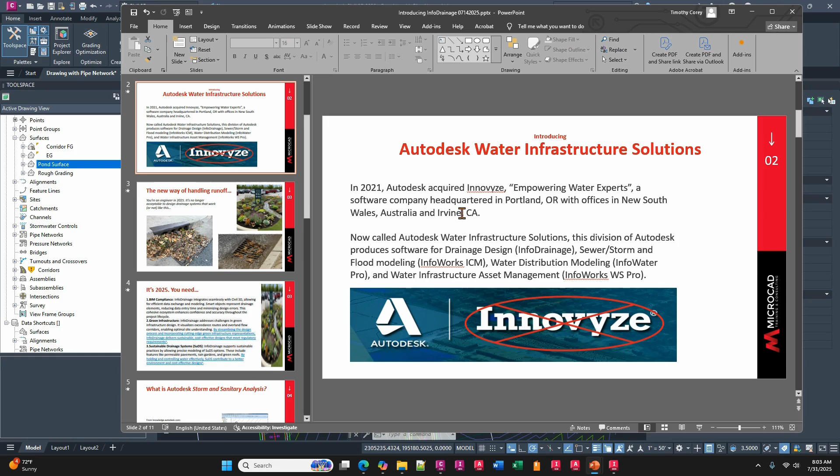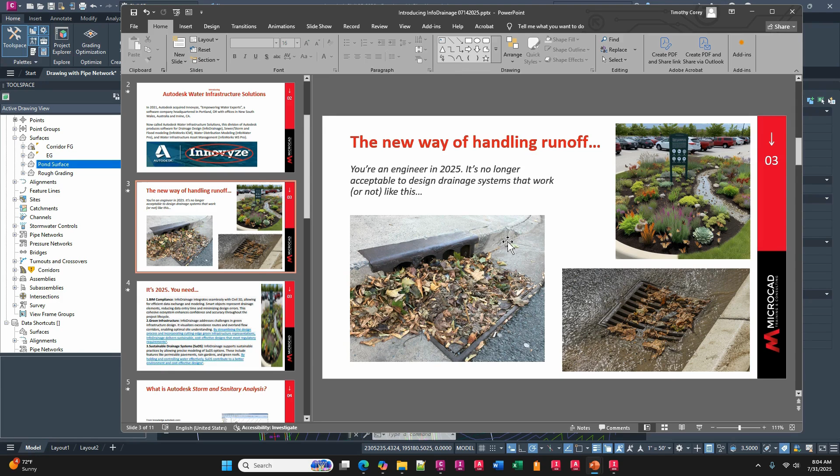So talking about InfoDrainage, this slide really is meant to illustrate how drainage design has changed and what you're trying to get out of your drainage design has changed. As you see on the left, they have a typical grate and it gets filled with leaves or sticks or other debris, and then it's not going to flow correctly. And that's all hard drainage in a concrete gutter, right?

Well, if you look in the upper right of this image, this is a rain garden. This is where InfoDrainage comes in, designs these for you so you can have your infiltration built into the rain garden. So you're kicking out clean water on the other end instead of trying to put all this debris through, etc.

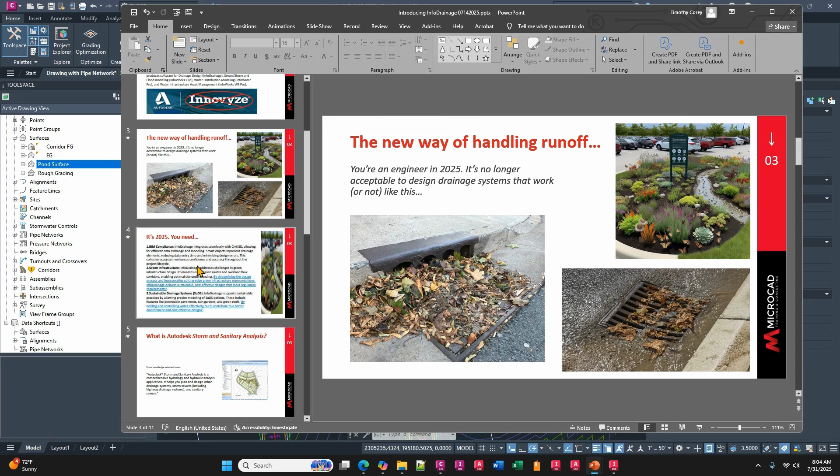A couple other advantages of using InfoDrainage is that it has BIM compliance, which is a big word these days, right? Just about all infrastructure design projects, at least larger ones, are BIM based. If you get hired by an architect for their project, they want BIM based information. Well, InfoDrainage does that.

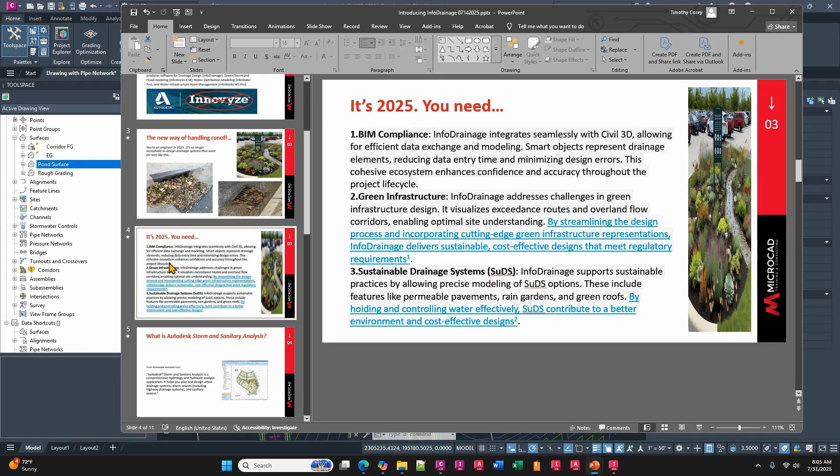It also addresses challenges for green infrastructure design. It can do overland flow corridors, underground calculations. And then there's SuDS, or sustainable drainage systems. That's a feature of InfoDrainage, whereas if you used Autodesk Storm and Sanitary Analysis, or relied on that for years with Civil 3D, it doesn't do BIM compliance, green infrastructure, and SuDS.

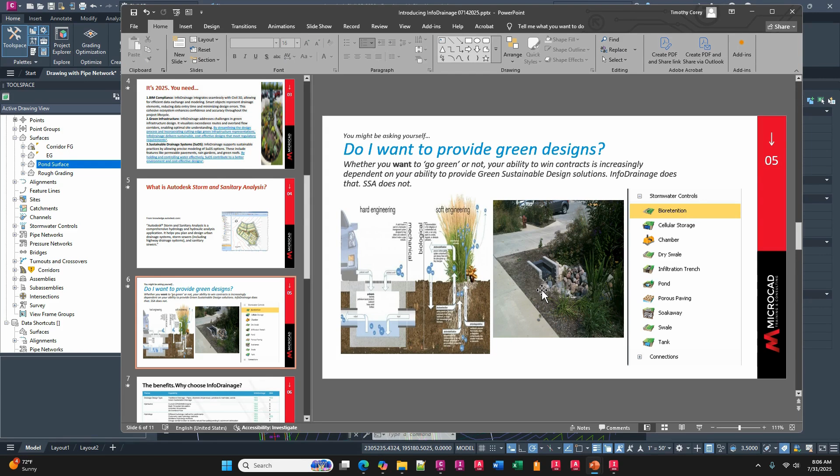So you might ask yourself, if you truly want to provide green designs to your clients, do you want to offer that through your firm? Well, the answer really is, whether you want to or not, if you can't or won't, your ability to win contracts is going to go way down. So this is a way of design that you may want to consider embracing as a way of enhancing your company's offerings and ensuring future work.

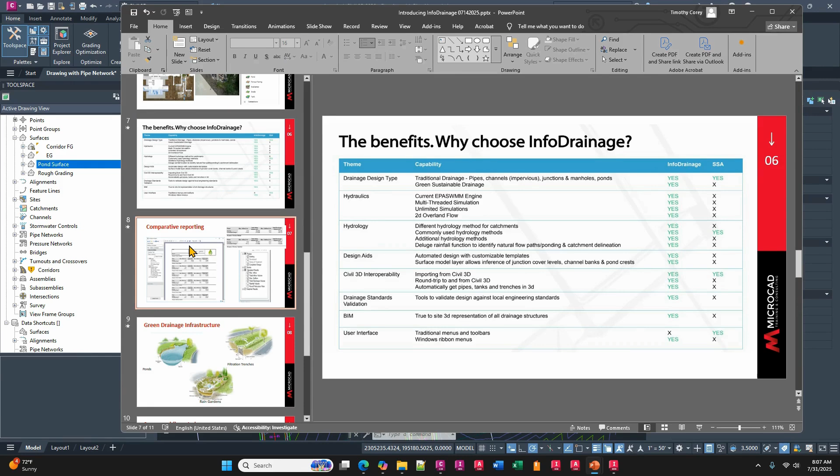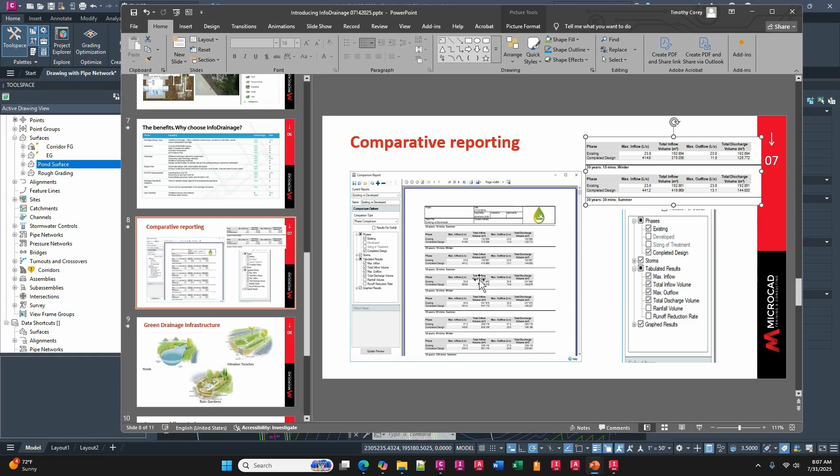This is a comparison. This table shows you the different features in the various versions, InfoDrainage versus Storm and Sanitary. And you can see all the different functionality we have here. Plus there's comparative reporting built in, so I can compare my existing conditions to my completed design. Easy to set up, nice clean reports.

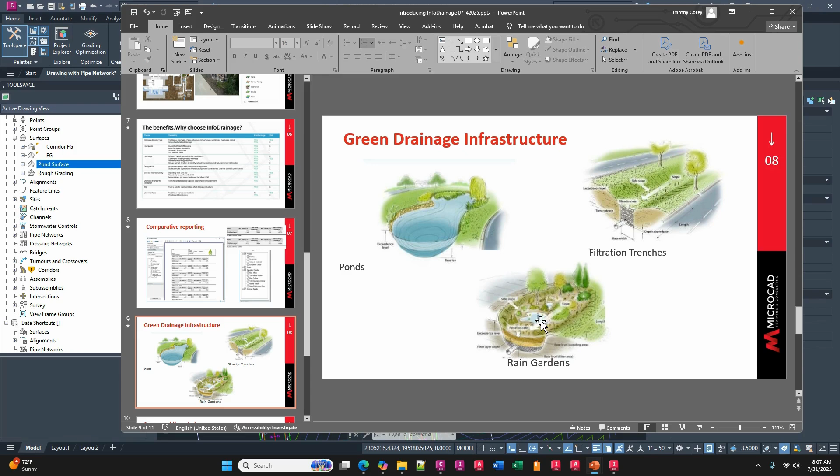This is a picture of a couple of different types of green drainage infrastructure that are provided as part of InfoDrainage. So you can design all these types of drainage systems. Ponds, which we can now do in Civil 3D, by the way, and I'm going to show you that. That's a nice deal. Rain gardens, and then filtration trenches.

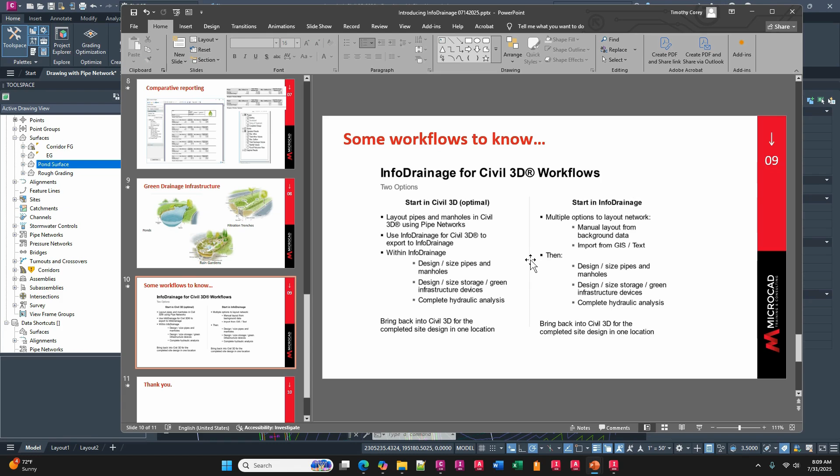If you start in InfoDrainage rather than Civil 3D, you can do manual layout on top of the background data, or you can import from a shapefile or ArcGIS files. Then you'll do your design, et cetera, and bring it back into Civil 3D at the end. So that's just a little workflow on the process.

Okay, let's take a look here in Civil 3D. I don't need to save that. So here's Civil 3D.

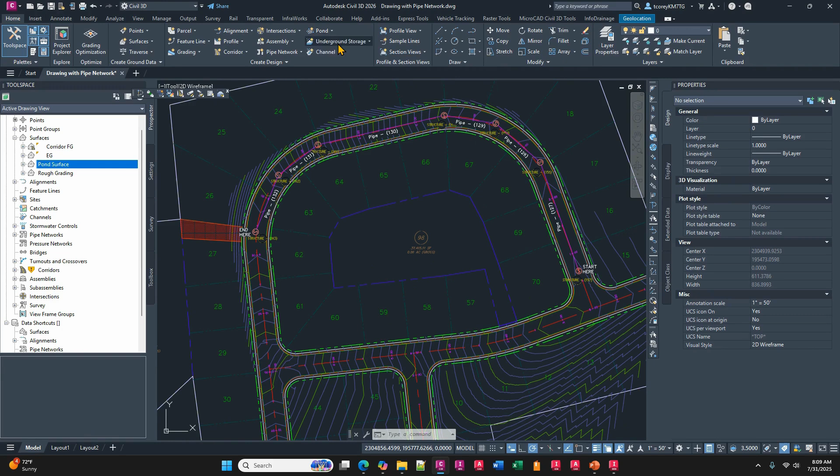I want to show you these couple of new features up here. First off, and I know this is going to be asked a lot about, is pond. People want to be able to create ponds in Civil 3D. Okay. How deep do I want it? What's the inside slope? Make it 1-to-1. And I'll set, I know that I want to use like 800.

I'm cheating, sorry.

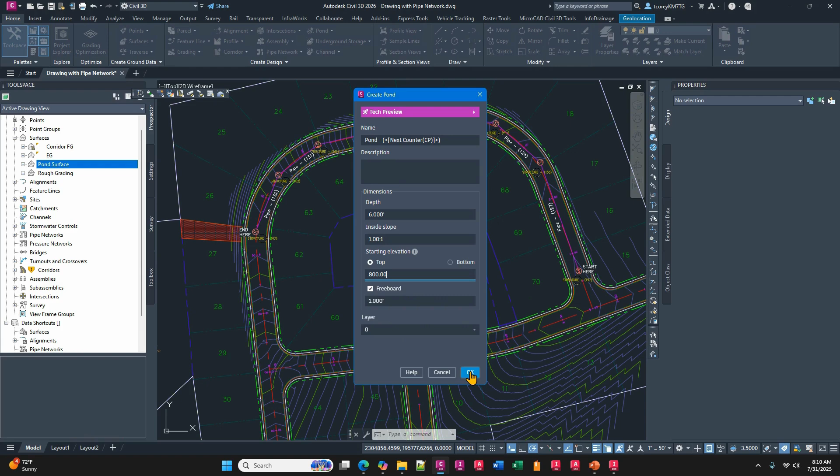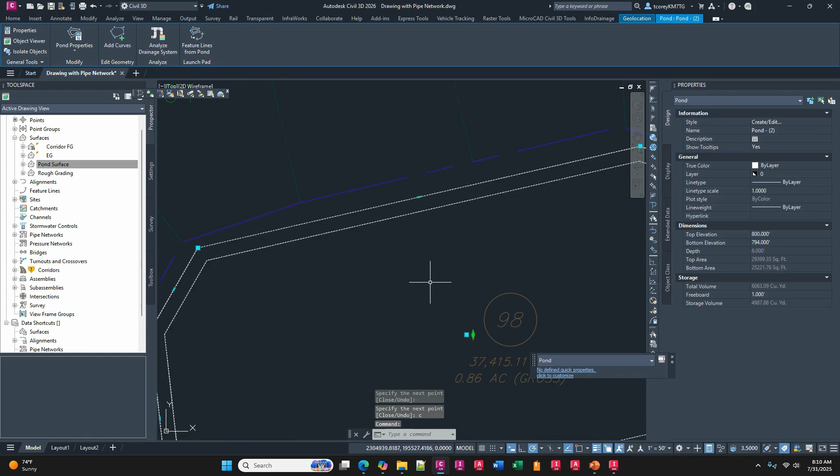And what layer, all that looks good. Okay, so I say okay, it wants to know where to put it. Well, I'll stick it back in here behind these parcels. And close. And you see it automatically builds the line, or it's not really, it's part of the pond. So I don't want to call it a polyline or a feature line at this point, because really that is part of the pond. But it adds that in there for you.

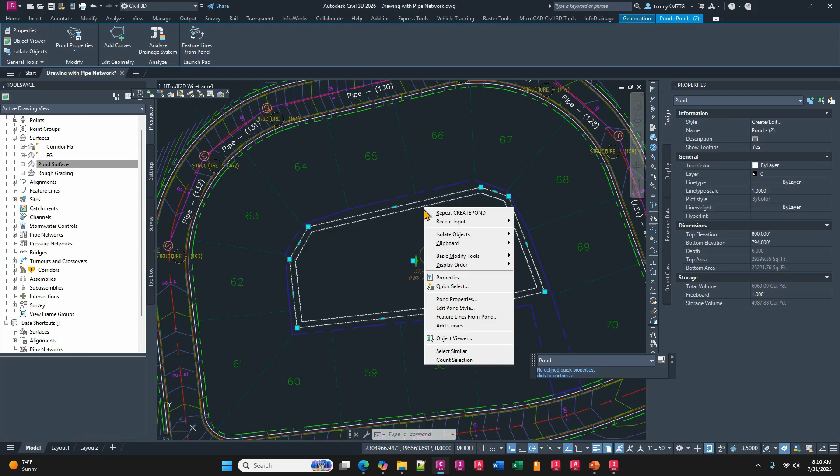Okay. Now what you can do, if you do want to add this to a surface, well, let me show you the properties of the pond first, because this helps you with the design. I can go to pond properties. Okay. Here's my storage. So at 6 feet deep, my rim elevation is 800, and this is the volume of the pond. I can kind of do like a stage storage sort of analysis here if I want.

I could say, well, what if I go to 7 feet? And then it's this much. And I'll do one at 10 feet. Okay, and then if you change the side slopes, maybe here I decide this does want to be 3-to-1 with it that deep, because you'd never get out. Okay.

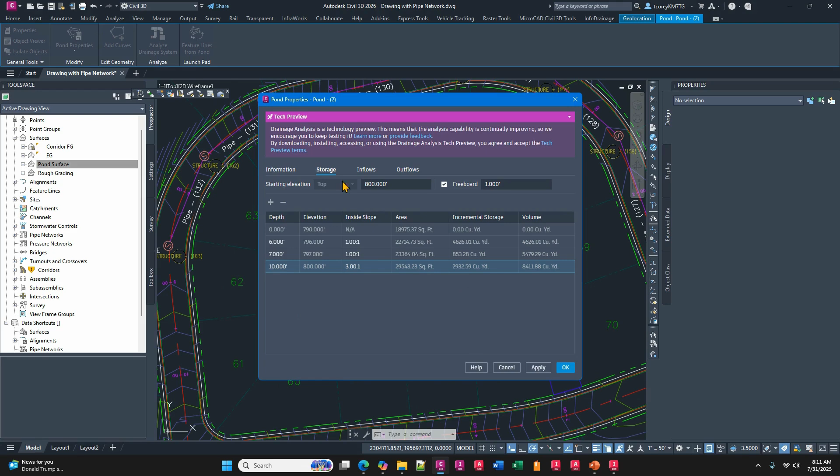Now what happens is it adds each of those lines, or those feature lines, or what can become feature lines, for different storage levels. It adds those into that pond for you. Now I can take this thing and extract the feature lines out of it. What style? That's fine. I'm just going to do the top and bottom and not all these extra ones.

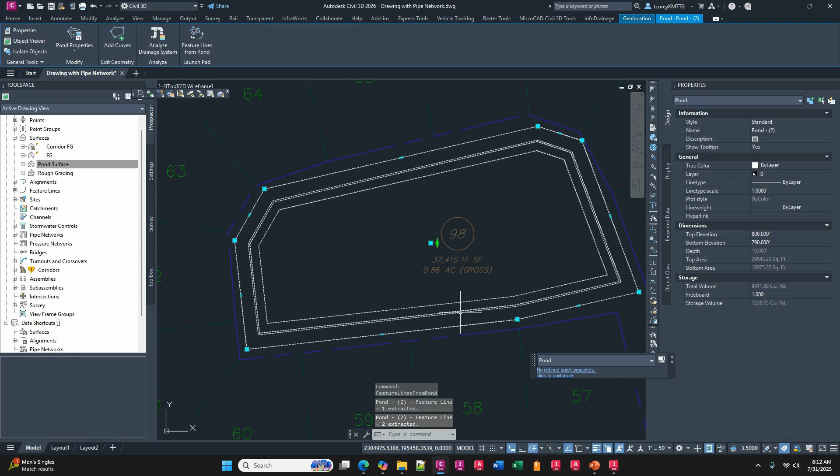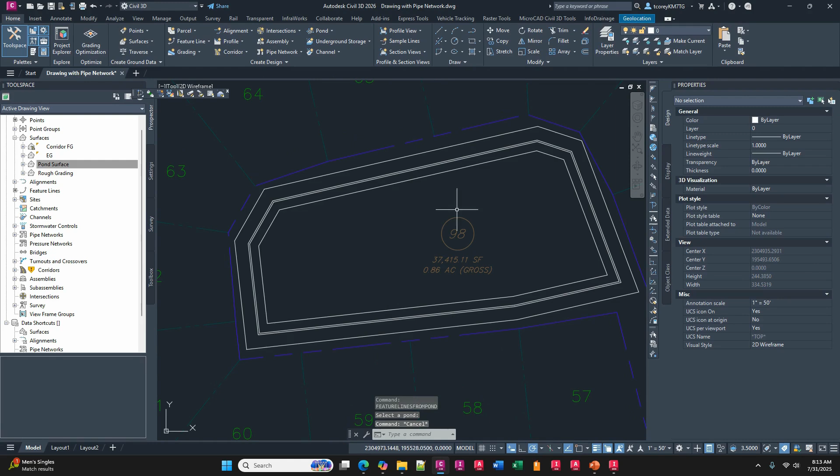If I do a dynamic link to the pond, then I can make it so that a pond surface automatically updates if I modify the pond. I'm not going to do that. I'm just going to do this. Okay, so now I have, where's my layer, C-TOPO feature. There we go. Okay, so it extracted those, and now I have feature lines there.

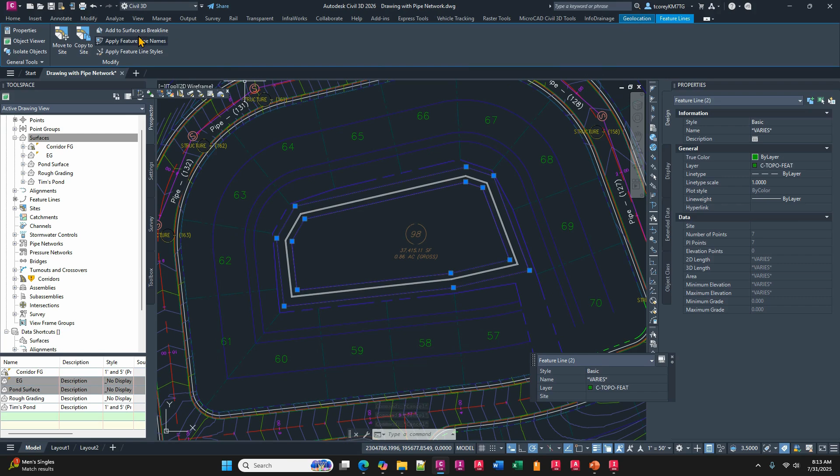So I can add those into a surface, right? I'm going to make my own new surface. This will be Tim's Pond. That's fine. So then I could take those two feature lines, that and that, add those to surface as break line, which surface, Tim's Pond.

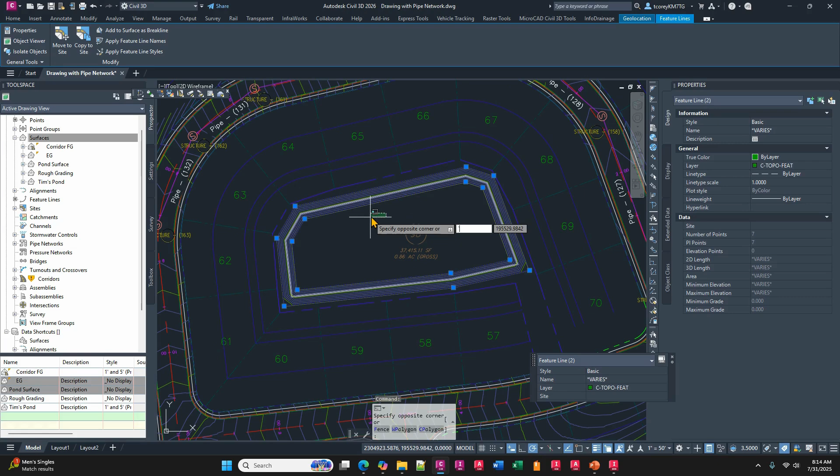Okay, I'm going to add some supplemental points, say every 10 feet. Tighten that 10 up just a hair. Okay. If I can find the escape button. There we go. So now we have a TIN surface of that pond. Object view. Okay.

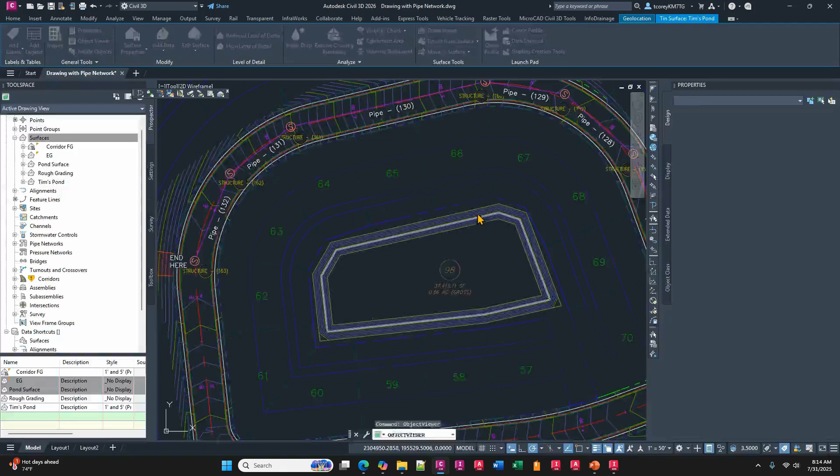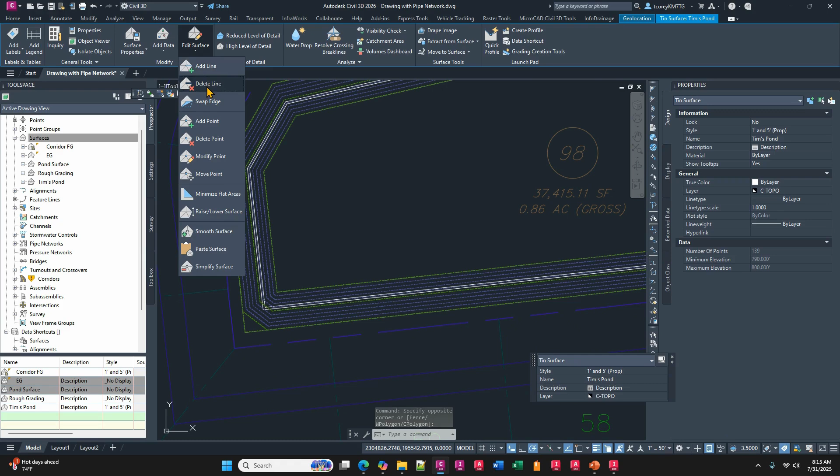Now I'll show you a little trick here for fixing up these kind of deals where it cuts across with the TIN there and doesn't fill in this area. That's super easy to fix. You could have done it in old versions, but in 25 and 26 versions of Civil 3D, you don't have to set a style or anything. You just go here, edit surface, add line, and then it turns on the TIN lines automatically.

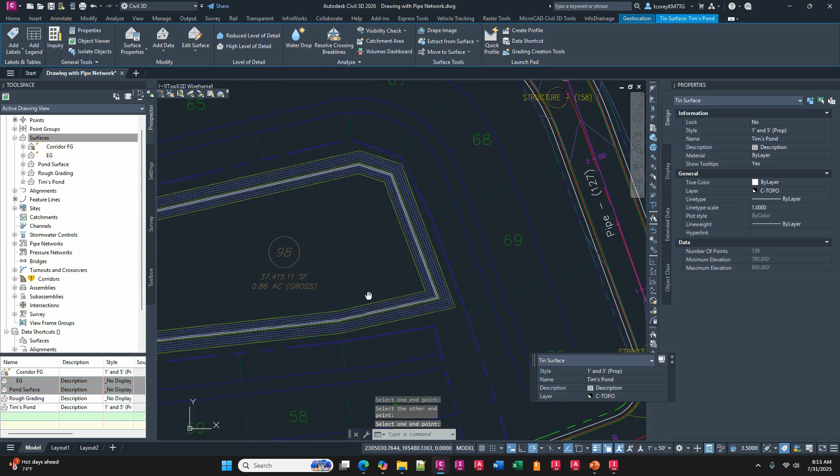And then I can just say I want a line added there to there. That fixed up that one. And I'll do another one here to here and fixed up that one. Let's do that. So now my pond looks correct, right? If I wanted to take that and make a single surface that shows all of it, I could go, I think there's a boundary in this surface here.

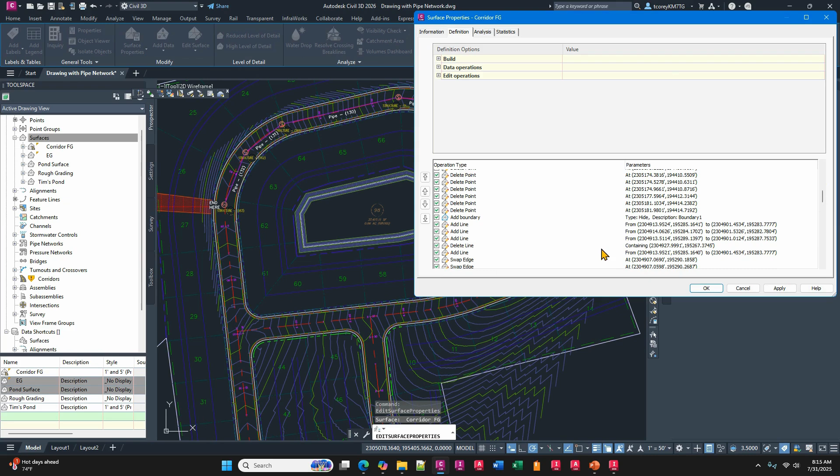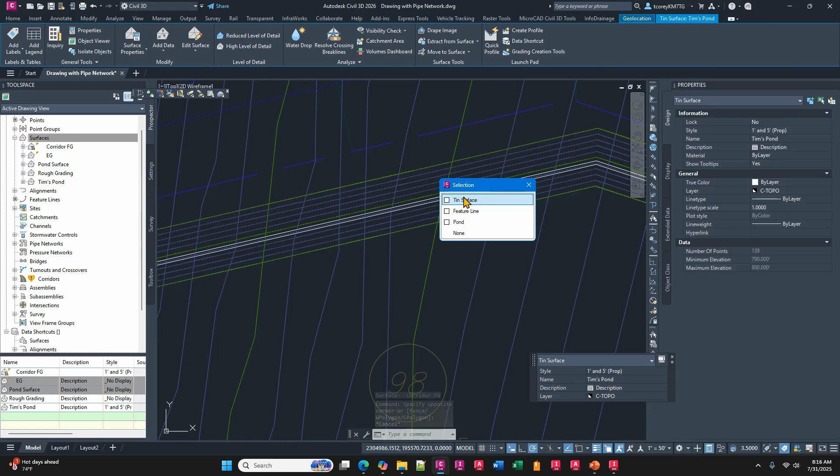There. Okay. So what I want to do is I want to paste this into here. Now you may want to take and do some daylighting off of this feature line, right? Go to grading tools. So if you wanted to grade and have it come down to the surface, you can go right off this outside feature line for that.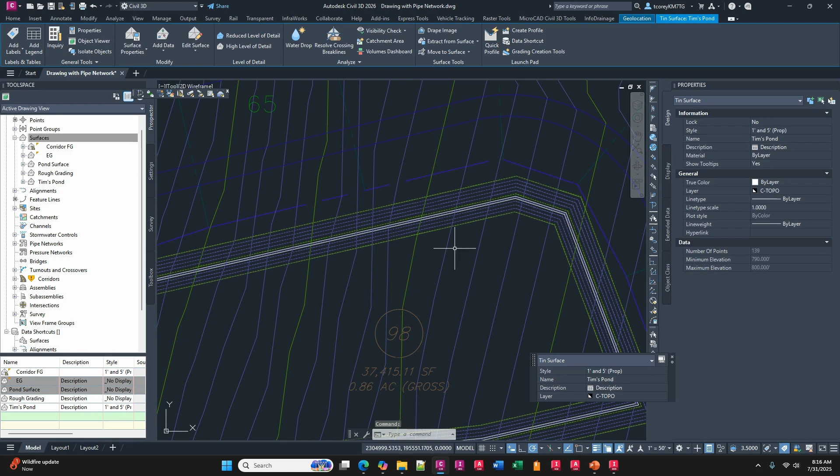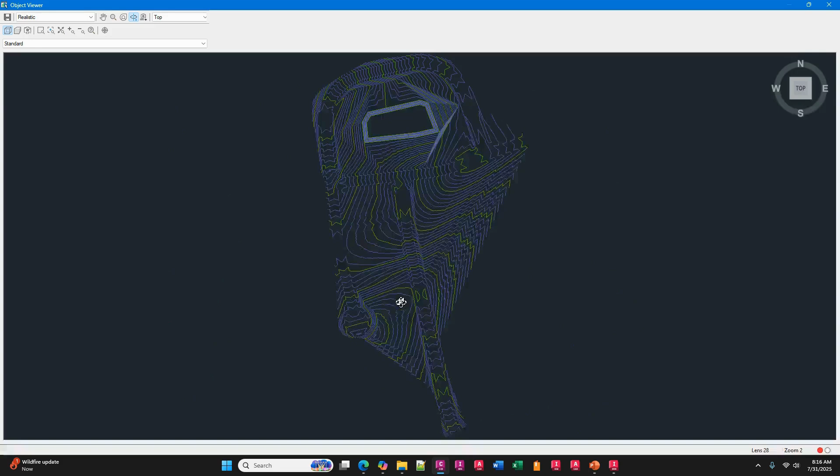But I'm going to show you that overall surface now. I'm going to paste into corridor FG, go down here, edit, paste surface, Tim's Pond. Now this is a combo surface. Looks like that.

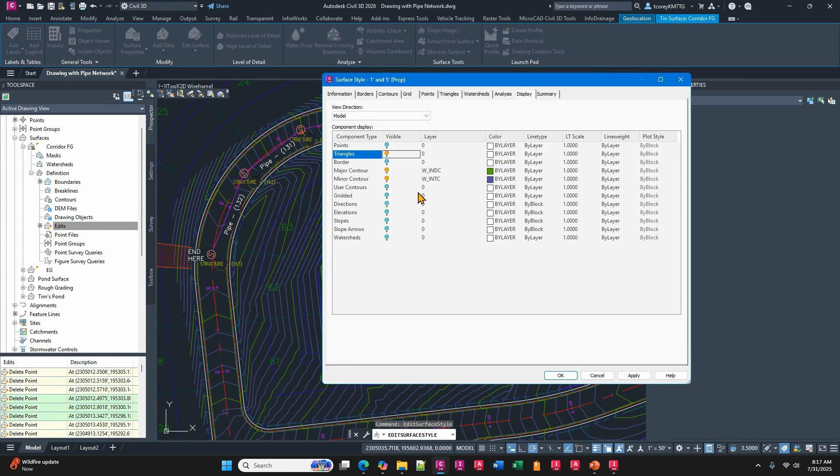Now, if I edit my style, I can tell it in a 3D, turn on the triangles, make it look a little better, fill it in. Oops. So object viewer, there you go, and there's your pond in there. So that's a real quick, easy way of building a pond now.

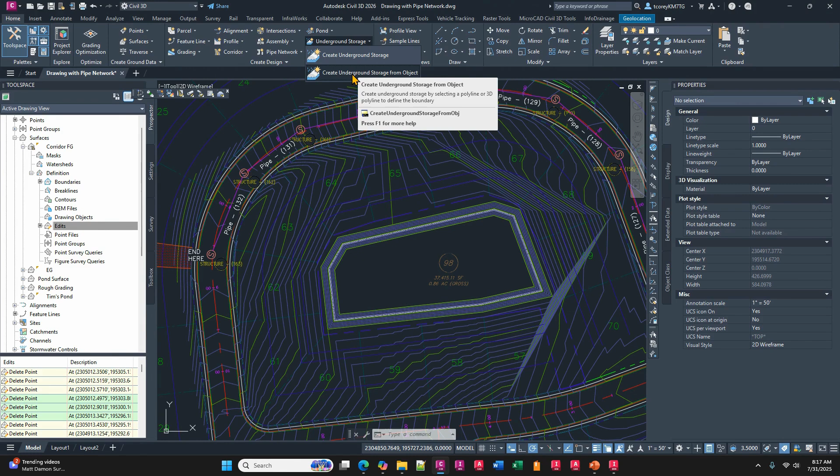They've also given you a tool for underground storage, okay? That can be where you're going to sketch out the outline of the storage and then give it the properties, or you could have a polyline already there and it'll create an underground storage from that object. And you can do a channel.

So for example, maybe I want a drainage channel running from over here. I'm going to put it here. I don't know what that's doing there. And I come out in this direction like that. Well, if I want to turn that into a channel, create channel.

Now I do want to point out these tools that I'm showing here, these are technical previews as part of Civil 3D 2026. So we don't know for sure the future of these. The idea here is for you to use it, make comments to Autodesk, tell them what you like, what you don't like, etc. I don't know what's going to happen at the end of the tech preview, like maybe in Civil 3D 2027, they might make you subscribe to these tools with InfoDrainage or something. I just don't know.

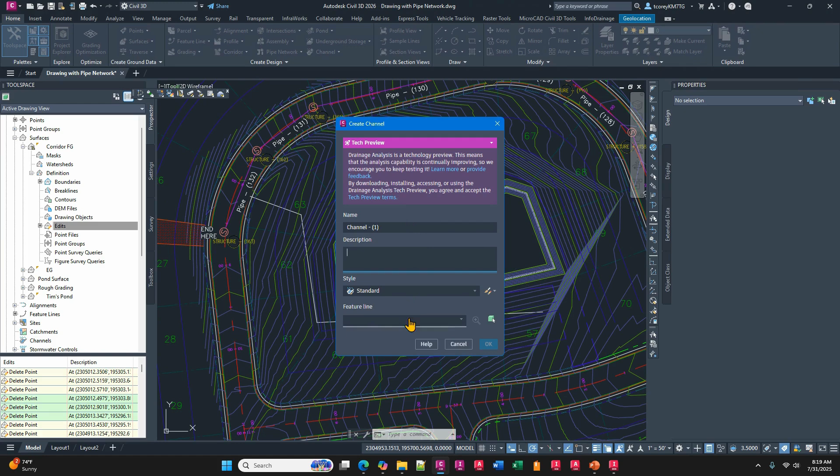But nonetheless, I'm going to go ahead and create a channel. Oh, I didn't pick it. Will it use a polyline? Oh, I do have a feature. No, there's another feature line. Has to be a feature line. My mistake. Okay, so let's create a feature line from object, from that.

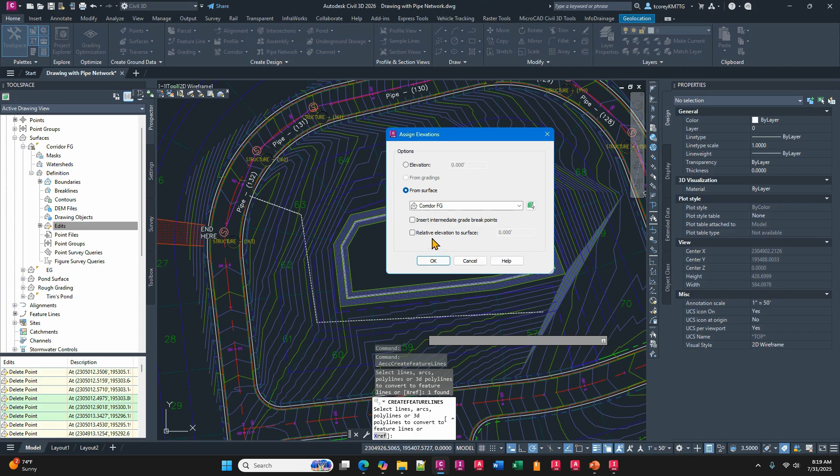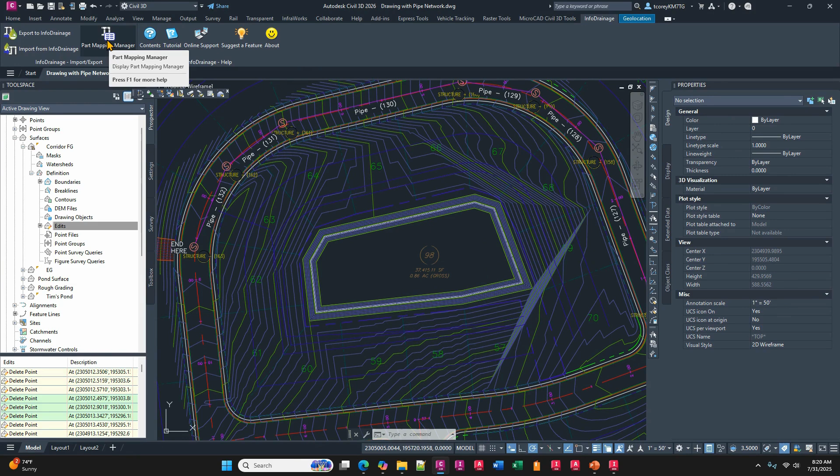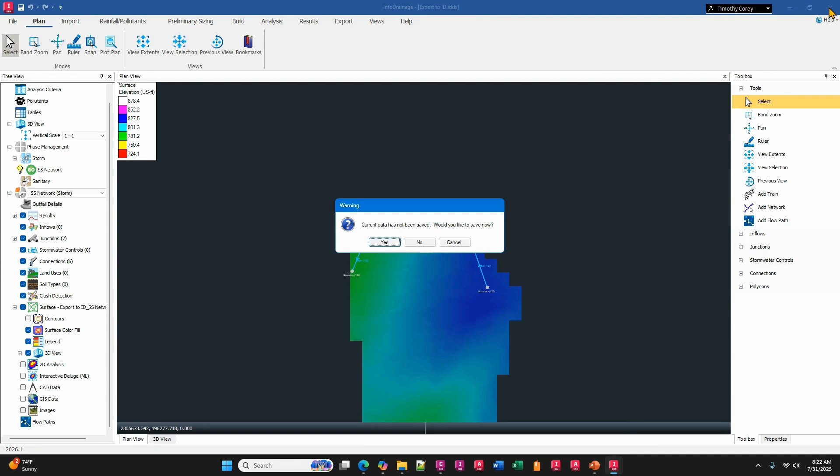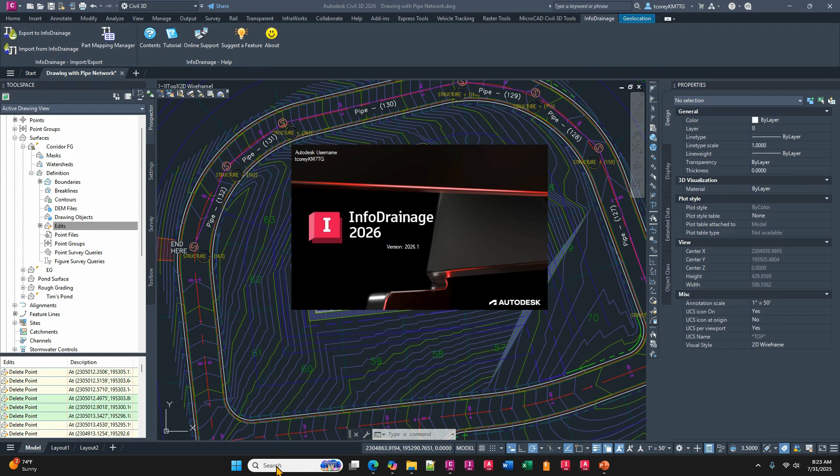Excuse me 1 second. Hey Tim, I think the audio, maybe you're muted. We can't hear you. Oh, yeah, yep. I'm sorry, I was muted. Yep. No worries. Okay.

Okay. And then here I've brought this into InfoDrainage. And then of course from here, you could do flow calculations. You can add additional structures. So if I was going to do some green design and I want a swale, here's a dry swale, here's ponds. Okay.

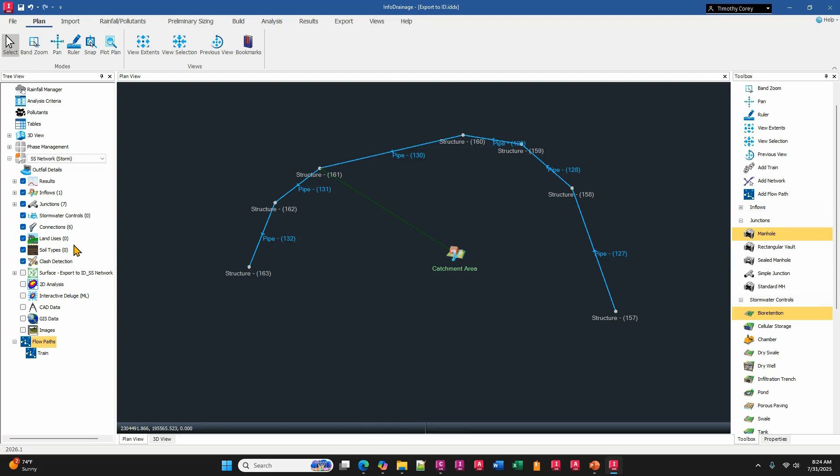Let me go back and just see where I need to. Oh yeah, I want to tell you a little bit more about the Autodesk water department and what softwares are available to you. You may not just be doing sewer and storm drain design. You might also need to do flood control design. Okay. That's where this InfoWorks ICM comes in. ICM standing for Integrated Catchment Model.

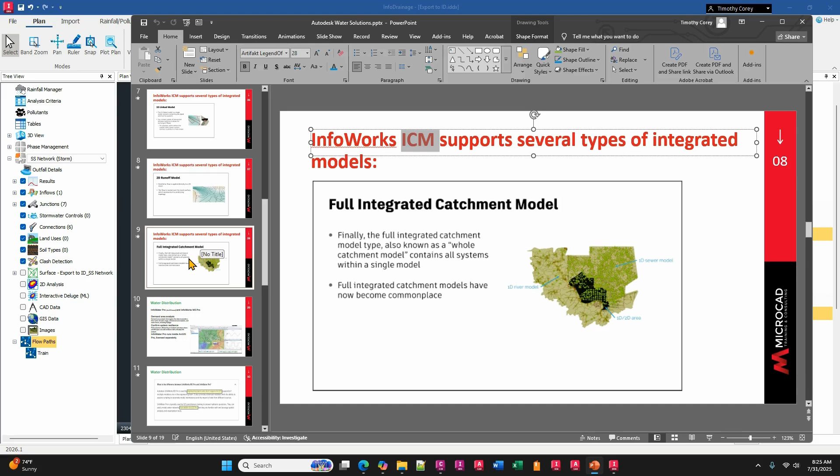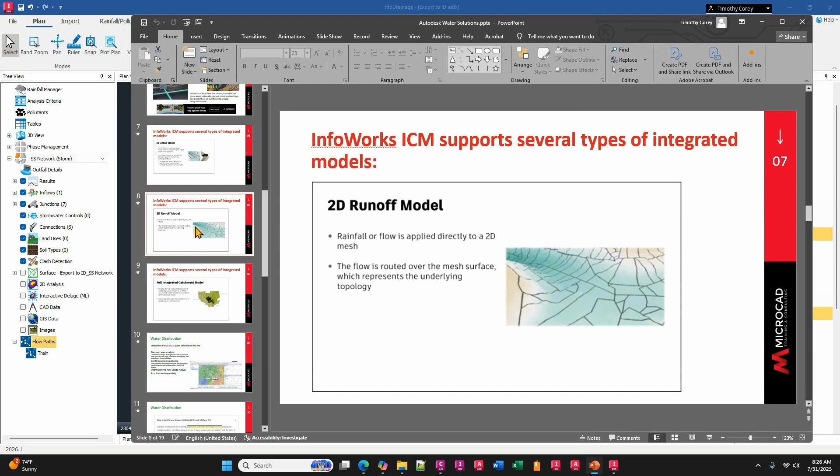Now, what's different here with the InfoWorks is that it can use the various different types of models and put them together into a full single total model for your entire project. Okay, so you could have your 1D and 2D networks, and it can merge those into a single model. Yeah, here's your 2D runoff model. Okay, so this takes your mesh surface and calculates where flooding might occur, etc.

And we also have water distribution software. This is InfoWater Pro, as well as InfoWorks WS Pro. That WS, water service maybe, or water systems. The idea here, this is water delivery. Now, if you're an ArcGIS user, you can get InfoWater Pro, which runs inside your ArcGIS.

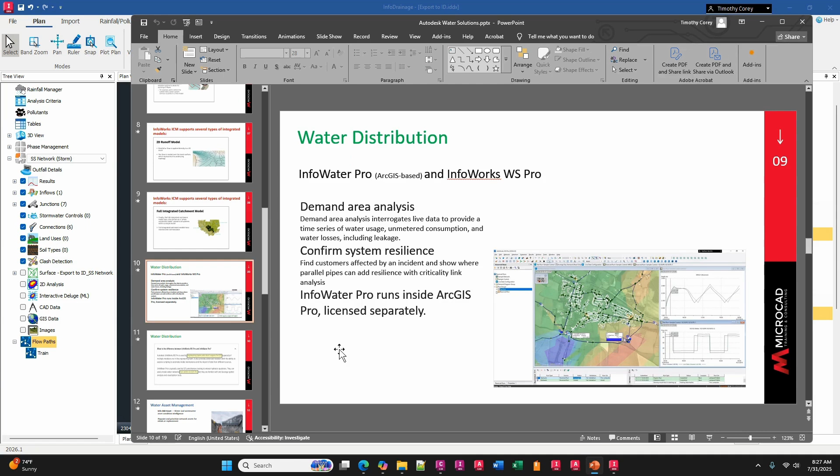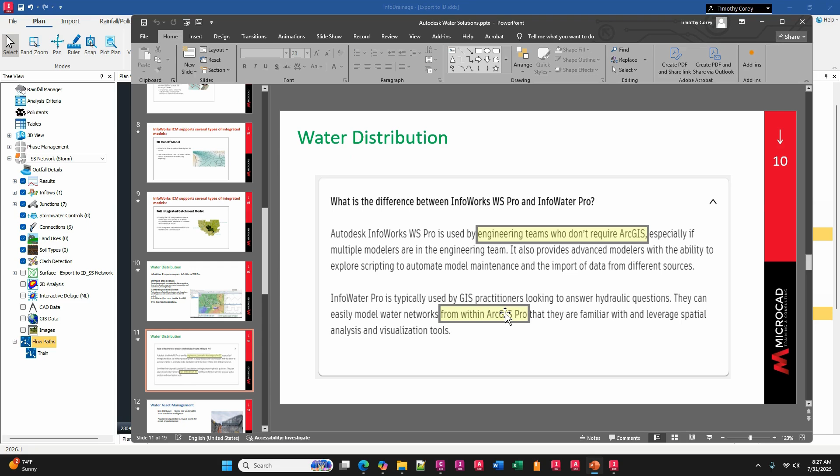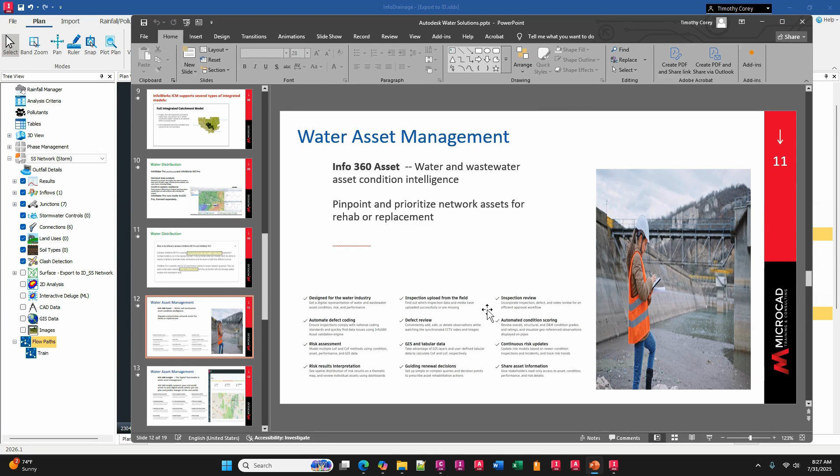If you want to be more of a standalone but team-based, then InfoWorks WS Pro. InfoWorks WS Pro is used by engineering teams who don't require ArcGIS. And then InfoWater Pro from within ArcGIS. And then they have this Info 360 Asset, which is water asset management. And I'm just going to slowly scroll through those.